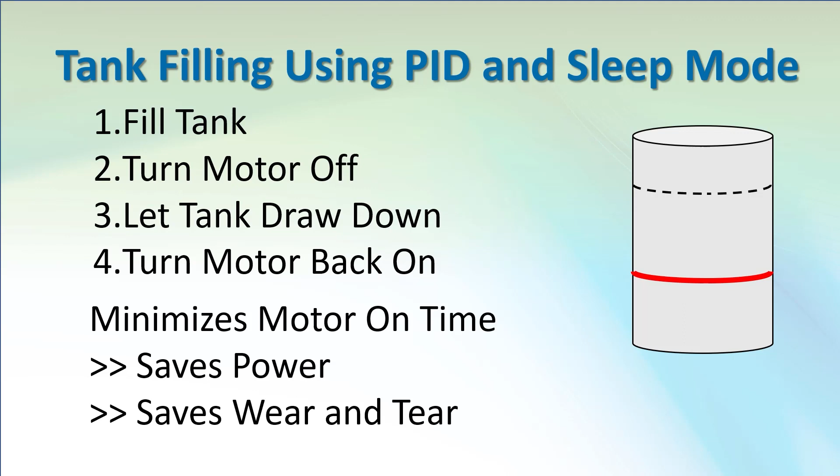We'll do the tank filling example so we can repurpose the hardware we used in the quick start videos. This is the system we used in those videos. The only differences are, we'll turn the valves off and just use this pipe to fill the tank. We don't need a pressure sensor. Instead, we'll use an ultrasonic sensor to detect the water level.

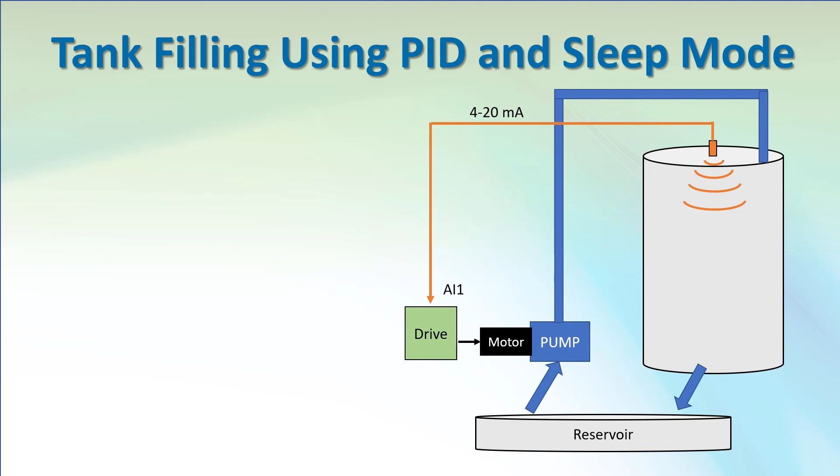The ultrasonic sensor uses a different pin for the signal, so I had to swap signal wires at the drive. And the ultrasonic sensor is a 4 to 20 milliamp sensor, while the pressure sensor was a 0 to 10 volt sensor. So I had to flip this little switch on the I/O module to current and change parameter 233, which we'll cover in a minute.

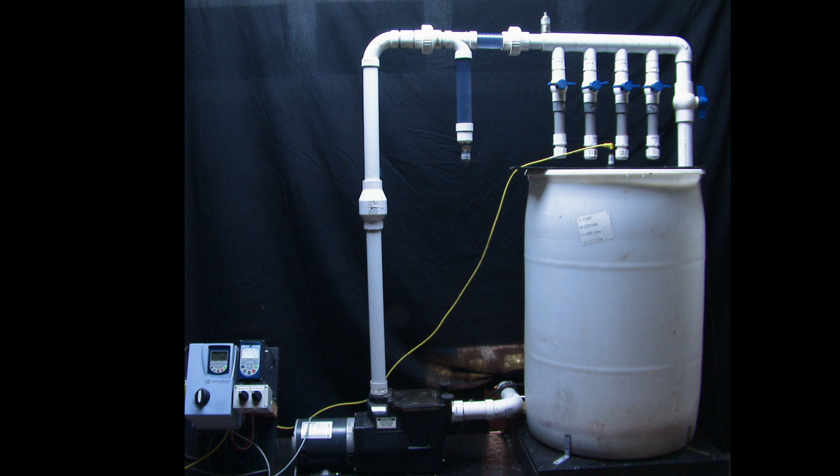Here's the actual hardware. This WEG CFW 500 drive controls this motor, which pumps the water into the tank via this pipe. These valves are closed, and this one's opened, so the water flows like this. I'll block out the valves and the pressure sensor to remind us we aren't using them. There's a manual valve on the outlet, so we can change the load by changing how fast the water leaves the tank.

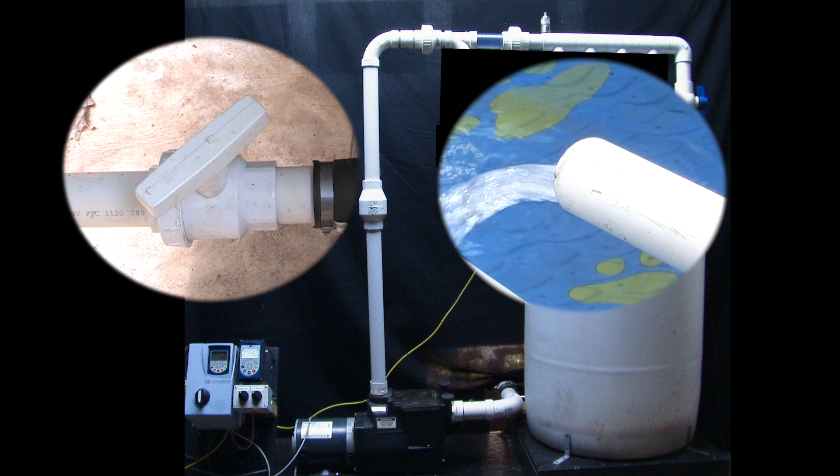I also added a styrofoam disc with LEDs on it to make it easier for you to see the water level, and I just mounted the ultrasonic sensor on a board that I laid across the top of the tank so I could look down and see the styrofoam LED disc floating on top of the water. I configured the ultrasonic sensor to give me a large reading up here and a small reading down here so we can measure how full the tank is. 0% full or 100% full, for example.

We're using the same switches as in the previous videos, and we'll use the remote HMI again because it does a much better job of showing us the things we need to see. I'll rearrange the screen to make it easier for you to see the drive's HMI, control switches, and tank.

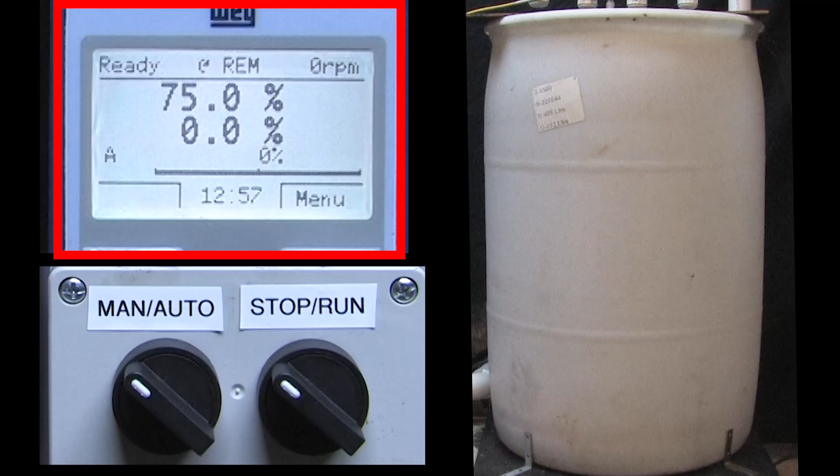This is the PID configuration we used in the CFW 500 Soft PLC internal PID video. We'll use that version of PID because I just finished that video and everything's still set up, and I just like the way the Soft PLC version shows all the information on the remote HMI. Now everything we do here will apply directly to the drive's built-in PID, you just use different parameter numbers. I'll give you a cross-reference list at the end of this video that shows you how to convert everything we do here to the drive's built-in PID.

And we only need to change a couple things. Parameter 233 needs to be changed to 4 to 20 milliamps to match the ultrasonic sensor. Since we'll be measuring the fill level of the tank in percent, we need to change our PID units to percent in parameter 510. PV min and PV max need to be 0 to 100%. I also modified the PID coefficients for tank filling. I'll explain why and how I did that at the end of this video for anyone that's curious. Let's highlight everything we changed in red to make it easier for you to see the differences.

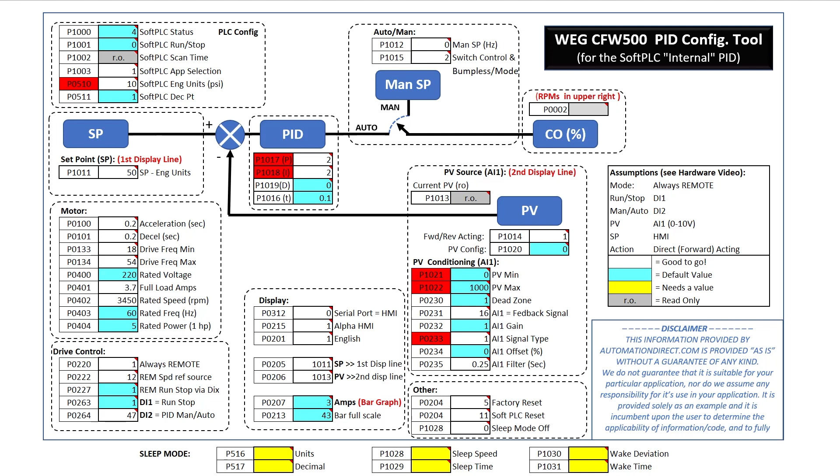I put the sleep mode related parameters down here. We need to make sure the sleep mode units in parameter 516 is set to Hertz or RPM. You can't use anything else. We'll use RPM. And parameter 517 has to be set to 0 decimal places when using RPM units. If you use Hertz, you have to use a single decimal place.

Now, one side note. This is the firmware version of the drive I'm using. In that version, even though you set parameter 517 to 0 decimal places, the display shows parameter 1028 as having 1 decimal place. So this is really 1500, not 150, for example. Now that'll probably be fixed by the time you see this video. WEG is very responsive to things like this, but just beware if you have an older firmware version like I do.

To enable sleep mode, we need to put a motor speed here. Let's say we want to fill the tank to this level. Well, that's our set point. When PID sees the water's way down here, we get a large difference between where we want to be and where the water is. That is, we get a large difference between the desired set point and the process variable. PID responds by going to the max motor speed.

As the water level rises and gets close to the set point, PID backs off on the motor speed all the way to whatever speed is required to maintain this level. Now that speed will change depending on how fast the water is being pulled from the tank. In tank filling applications like this, most of the time we don't want to maintain the water level.

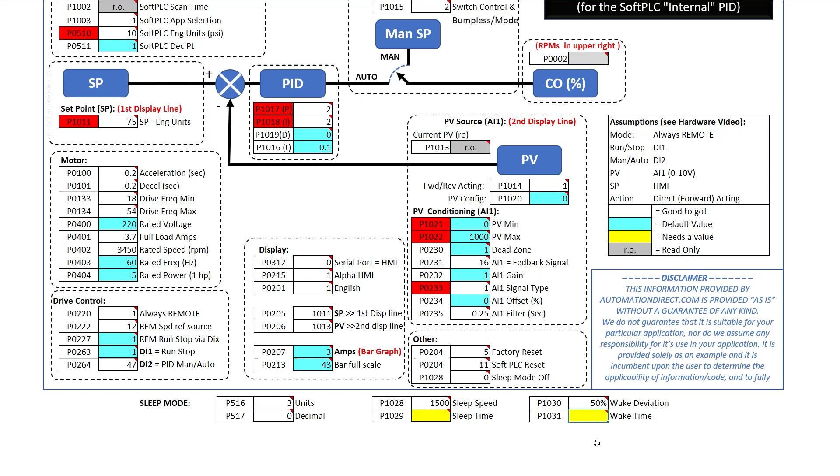And the lower level being relative to the set point means when you change the set point, the lower level changes with it. You don't have to change that too. The delay times allow you to add hysteresis if you have a messy process and don't want intermittent waves or splashes or bubbles to trigger sleep mode. We don't really have a need for delays in this video, so we'll make both of those 1 second just so we can see how it works without extending the video too much.

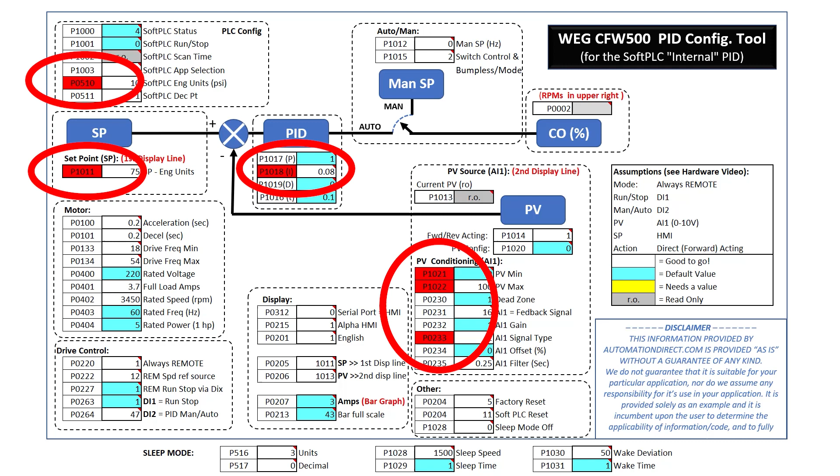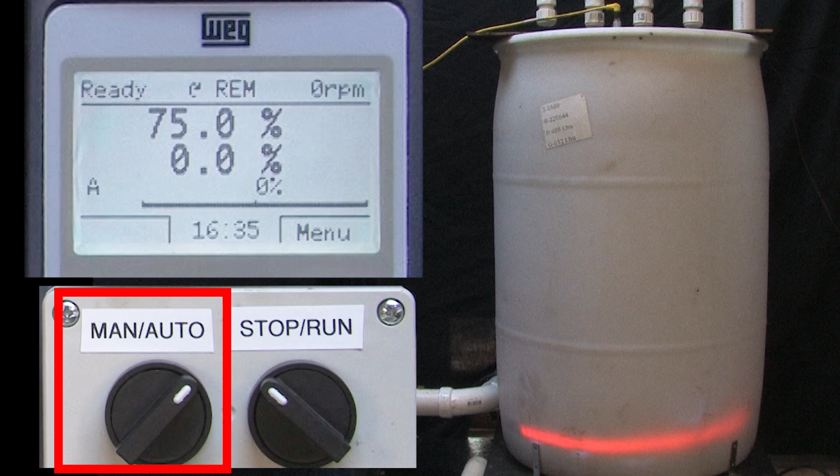So, all we did was change a couple things up here and add the 4 sleep mode parameters. Not bad at all. I already entered all those parameters into the drive. We see our 75% full set point here, for example. And let's turn the water level LEDs on to make it easier for you to see the water level. In the Soft PLC internal PID video, we found that these were labeled for the drive's built-in PID, and that the Soft PLC's version we're using uses the opposite contact state. I'll mark them like this to remind us of that.

Let's switch to auto mode and switch to run. PID sees a big difference here, bigger than the 50% we asked for, so it starts to automatically fill the tank. We see the water level LEDs rise and the actual sensor feedback over here on the HMI display. Notice on this initial fill, the output current's going a little nuts, and if you listen to the audio, you can hear the system oscillating. That's caused by the PID coefficients we're using. We'll take a closer look at why that's happening at the end of this video.

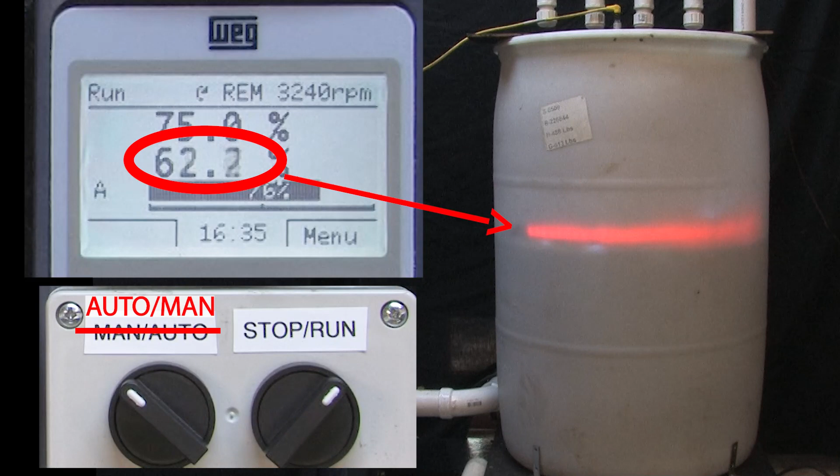Now remember, sleep mode isn't watching this level. It's watching the motor speed, and it's waiting for it to drop to the 1500 RPM we entered. And you can see as the water level approaches the 75% set point, PID starts to slow the motor down. When the motor speed gets down to 1500 RPM, it waits 1 second, and then puts PID to sleep, which stops the motor. We get this alarm message telling us sleep mode is active. That alarm's important because sleep mode can re-engage PID at any time without warning.

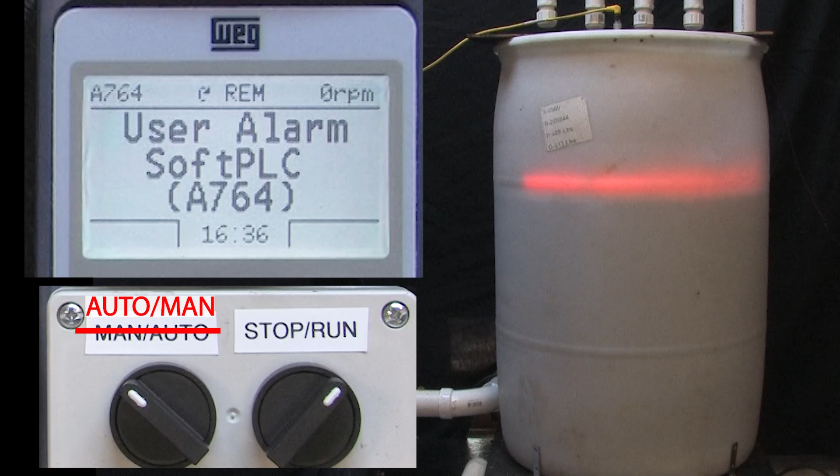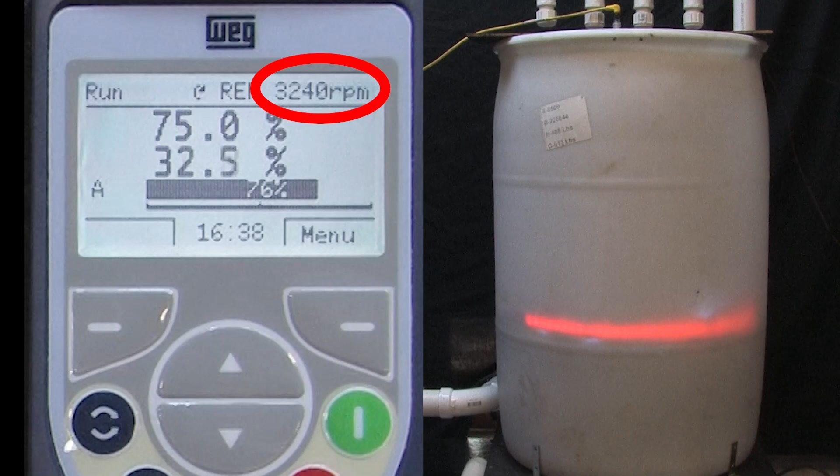I'll open the tank's drain valve to give us a medium load. The water level drops. That'll take a couple minutes, so I'll fast forward the video so you don't have to wait. And when it drops 50% below the set point, sleep mode waits the 1 second delay we gave it, clears the alarm, enables PID, which cranks up the motor speed to the max to try and overcome the huge difference. We see the tank filling.

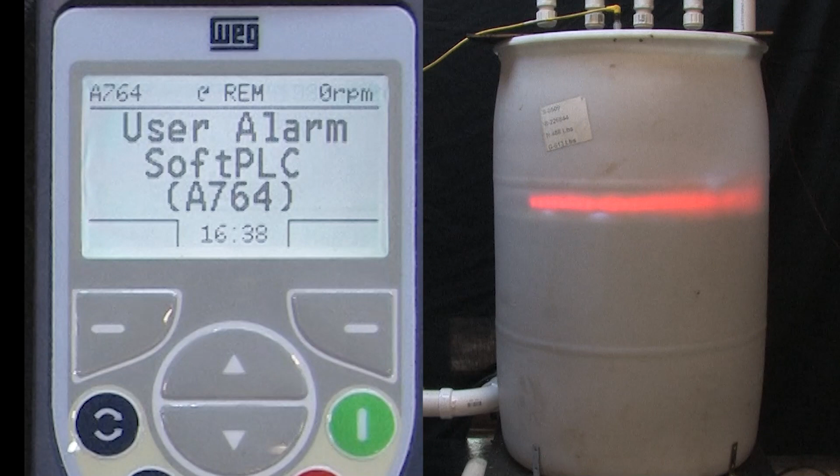Okay, the water level is getting close, and we see PID starting to back off on the motor speed. When the motor speed hits 1500 RPM, sleep mode waits the 1 second delay we asked for, and then disables PID. And we get the sleep mode alarm again. I'll fast forward through a few cycles so you can see it do its thing.

So how cool is that? The drive is automatically filling the tank for us without the need for an external PLC to monitor the process and enable or disable the drive, which saves you time, effort, and panel real estate. Sleep mode allows the drive to do it by itself for free. And all we had to do was change a couple PID parameters and enter the 4 new parameters for sleep mode. Not bad at all.

And if we use the drive's built-in PID function, not the Soft PLC's internal PID that we're using here, we can free up the drive's Soft PLC. To do that, just switch to the drive's built-in PID. This video shows you how to set that up, and use the drive sleep mode parameters instead of the Soft PLC sleep mode parameters. Other than that, it works exactly the same way. Well, that ought to be enough to get you started with sleep mode.

If you want to know why I chose the PID coefficient parameters we used here, well, this section's for you. Tank filling is a different kind of PID process. When you're trying to maintain something like the pressure in the system, for example, eventually the pressure levels off for a given motor speed. If you increase the motor speed, well, the pressure increases and levels off someplace else. In tank filling, the tank just keeps filling. It doesn't reach some level and stop. And increasing the motor speed just fills it faster. Again, never leveling off. Tank filling is called an integrating PID process, and it needs to be tuned differently.

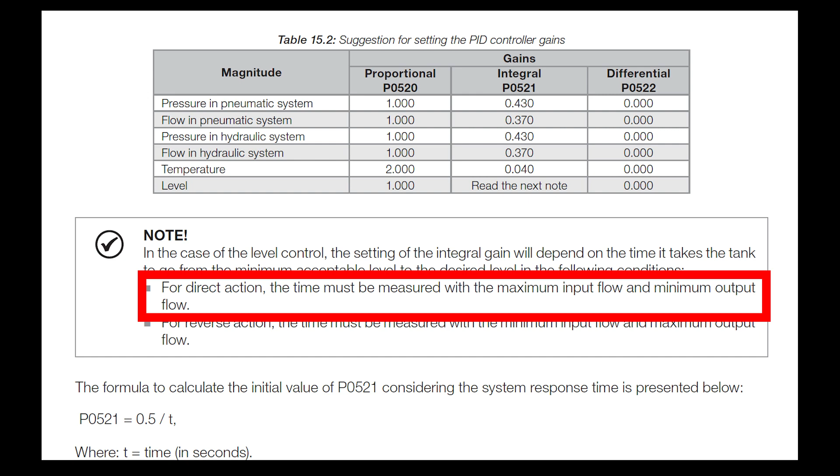If you want to learn more about that, then check out this series of videos on the GS4 family of drives. It's a different drive family, but the methods used to tune a tank filling PID loop apply exactly the same to any drive. Now for this video, I just went to the table in the user manual with the recommended PID coefficients for different types of applications. And I saw that for tank filling PID, there's a special note, which says for forward or direct acting systems, measure the fastest time it takes to fill the tank. For this demo, that'd be from 25 to 75% with the output valve closed. And divide 0.5 by that time.

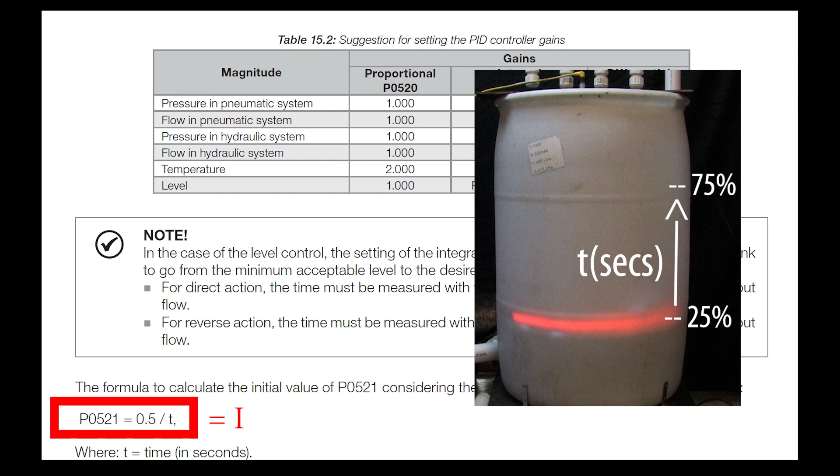Now when I tried that, PID stopped filling the tank way below the 75% I wanted. I would have gotten there eventually, but when the motor speed fell below the 1500 RPM we set to protect the pump, sleep mode put the system to sleep. Again, sleep mode doesn't care about the tank level. It only cares about the motor speed. So I kept increasing the I coefficient until I got close to 75% fill level. And that's how I came up with the 0.08 coefficient we used here.

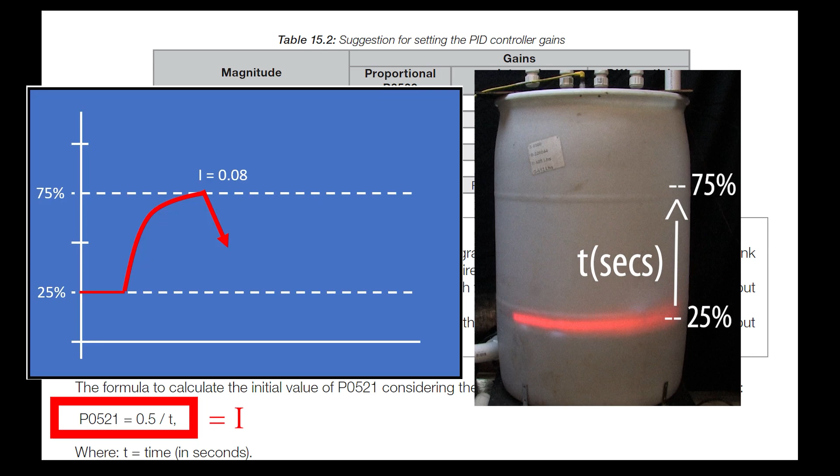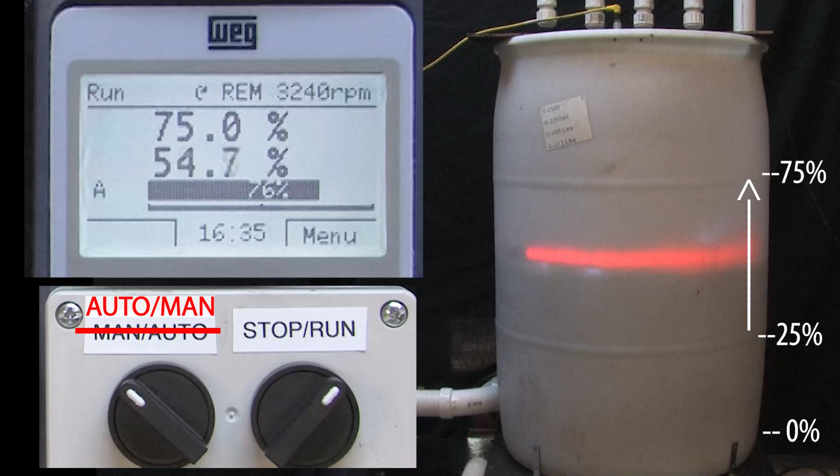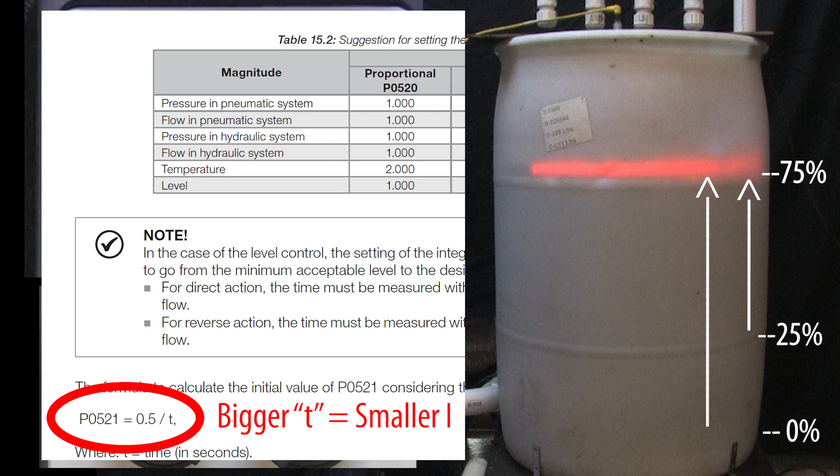But remember when we first started filling the tank at the beginning of the video? The output current went a little crazy and we could hear the system oscillating. What happened? Well, when the tank filling operation oscillates like that, it means the I coefficient is too large. Remember, we set the I coefficient to get the tank from 25 to 75%. But when we first started out, we had a larger distance to go, which takes more time. And according to our formula, we needed a smaller I coefficient. But because I knew that most of the time I'd be filling the tank from 25 to 75%, I left the I coefficient at the aggressive value, which was also the value that got me to 75%.

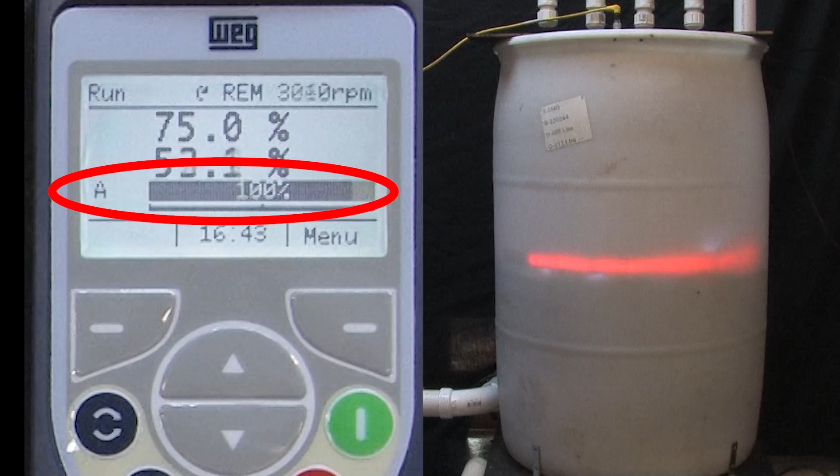Let's try that. I'll double the I coefficient and save it. Fast forward to the rest of the cycle. This time when the tank fills, you can see the current going nuts after the I term is integrated up, and you can hear the system oscillating. And if we wait for it, yep, the tank filled past the 75% value. Another indication that I was too big.

Now why did it do that? Well, PID was too aggressive, so the level was going to overshoot. And when PID slowed the motor down to compensate, sleep mode saw the motor speed drop below the 1500 RPM and put the system to sleep. Again, sleep mode monitors the motor speed, not the tank level.

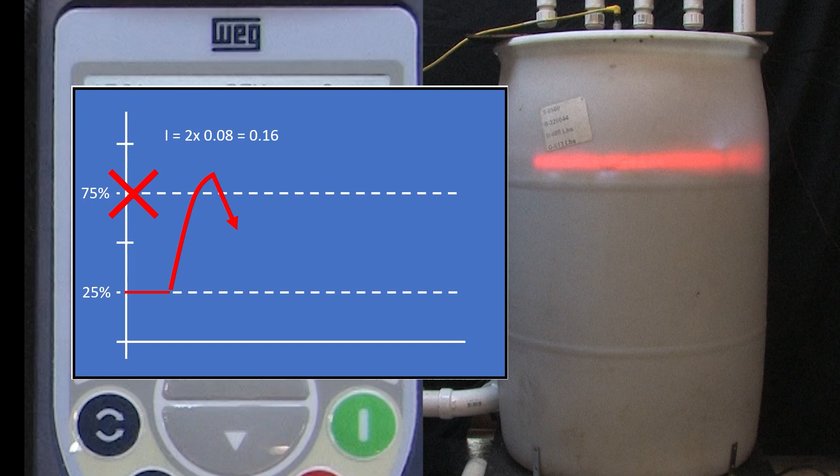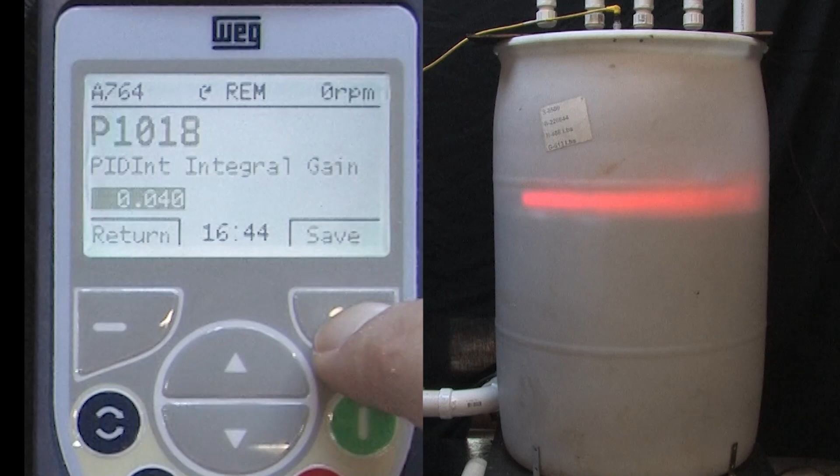Let's do the other extreme. While the tank's draining, let's cut the original 0.08 value for the I coefficient in half to 0.04. Save it, and I'll fast forward to the cycle. Well, the system didn't oscillate, but it also doesn't reach the 75% fill mark before going to sleep. Again, that tells us that I was too small.

Now it would have gotten to 75% eventually, but because sleep mode is watching the speed of the motor, and PID slowed the motor to below the 1500 RPM we set to protect the pump, sleep mode put the system to sleep. Hopefully that'll give you some insight into how to set up the I coefficient of the PID algorithm when doing a tank filling application.